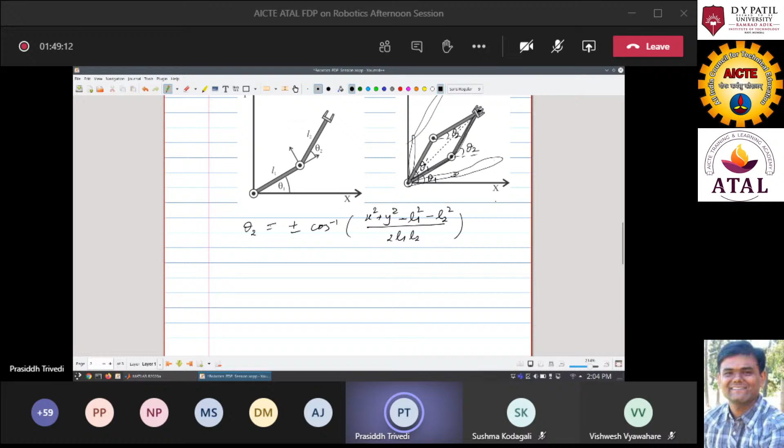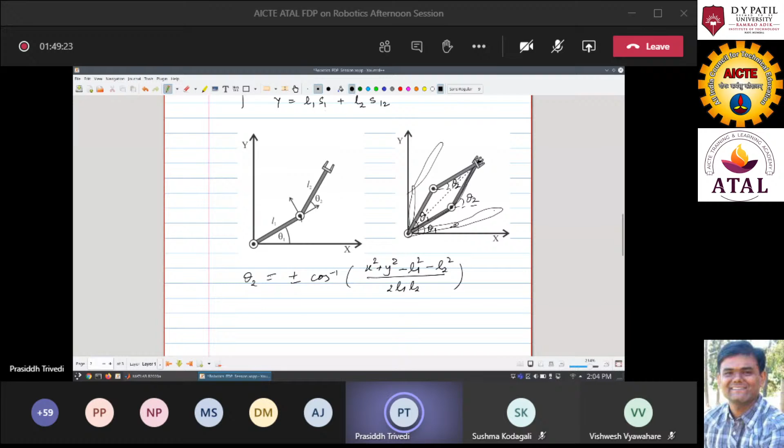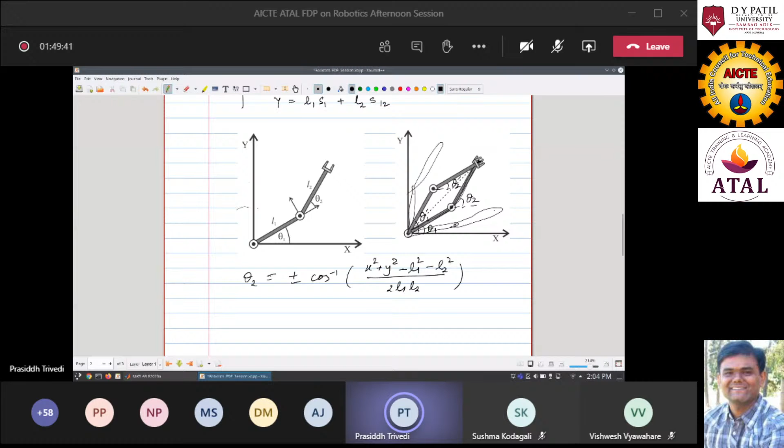So now we have seen kinematics, inverse kinematics, and now we want to look at the workspace. Here also it is quite evident that the workspace will be an annular region, larger than for the prismatic joint. If this joint was a prismatic joint instead of a revolute joint, then the annular region was ending here. But for this revolute joint, the annular region can extend inside. So the annular region is expected to be something like this.

Now we can plot this annular region, the workspace, in MATLAB, and that is the first analysis we are going to do in MATLAB. So let me open up my MATLAB. Are the fonts visible, or do I need to increase a little bit? Maybe increase.

Okay, I think these fonts are sufficient. Right. So let us start with the link 1 length. Link 1 length, let us keep it 0.4 meter, and link 2 length we will keep 0.3 meters. The theta variation is from 0 to 2 pi in steps of, let us keep the steps of 0.1.

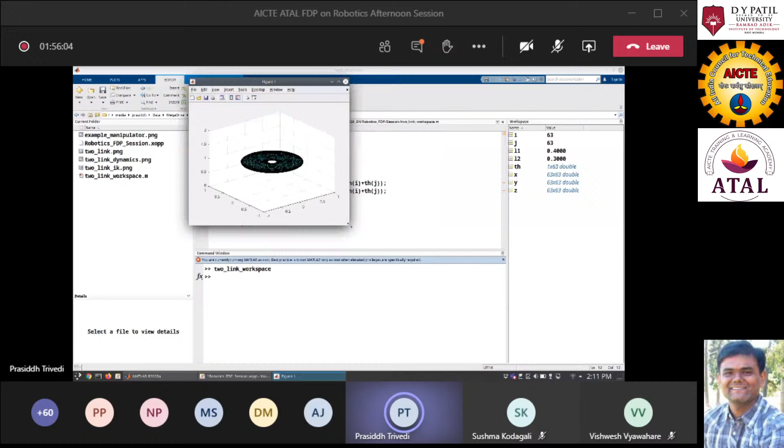Yeah. Now if you can see this workspace of the two-link manipulator, this is Z. Actually, this is on the XY plane only, but since we wanted to see this annular region properly, we have kept Z equal to 1 so that we can see this properly. We can make it 0 if we want to see this workspace on the plane itself. Right? So we can see that the workspace of this two-link manipulator is this annular region.

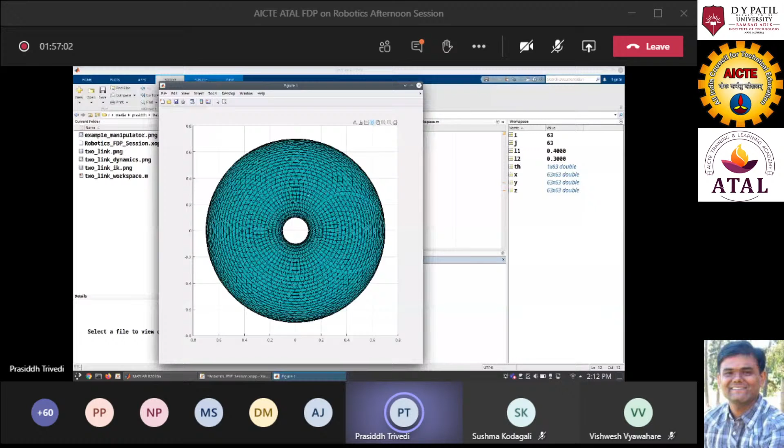Here you have the origin, your base link starts at the origin 0, 0, and then both the links can cover this entire region in this 2D plane. Okay, so this is the workspace for your two-link manipulator. So this manipulator end effector can move to all the points in this region. So that is a very important analysis to be performed when designing an industrial robot or any manipulator mechanism: what is the workspace of your mechanism?

If someone has used 3D printers, then 3D printers come with their workspace area, right? So they mention that the workspace of this 3D printer end effector is 15 by 15 by 15. Like that. So that workspace area is very important to be analyzed first when we have some robotic manipulators to be deployed for some application.

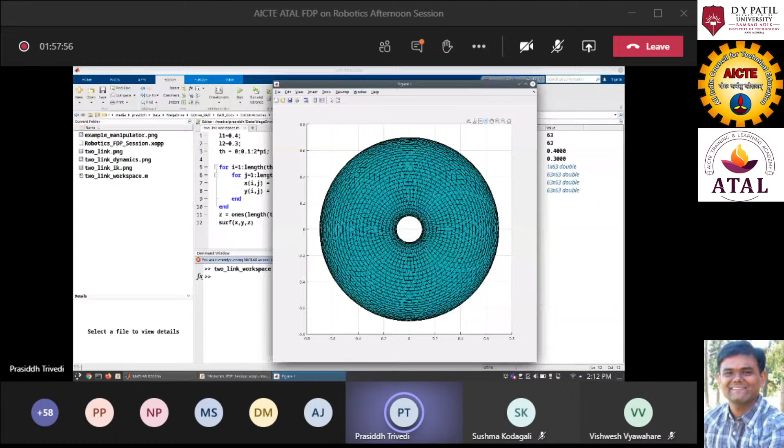Okay. So then with these kinematics, inverse kinematics, and workspace notions, there is a related notion of Jacobian. And how does Jacobian come into the picture? Because by definition, kinematics is the study of position and velocity of the rigid body without worrying about the forces. Right? In kinematics, we study position and velocity, both,

not forces. But right now in forward kinematics and inverse kinematics, we have studied only position. Right? So theta 1, theta 2 are the positions of both the links of the manipulator, and x and y are the coordinates of the end effector. That is the position of your end effector. Okay. So now what about velocity? To find out the velocities, we have to differentiate these equations with respect to time.

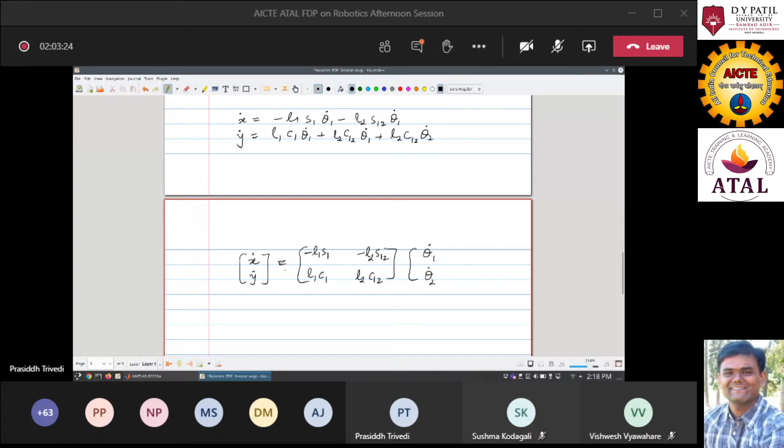Right. And this matrix is called the Jacobian matrix. This is the Jacobian of the given kinematic equation. So now we can write this: the position vector velocity x dot is equal to the Jacobian of the kinematics multiplied by the theta dot vector. So theta dot, the vector of velocities of the revolute joints, multiplied by the Jacobian gives us the velocity of the end effector.

But now we see the problem here. I mentioned that we may want the end effector to move at a certain speed. So then we are given some end effector speed, and we want to find out the speed of the manipulator angles. So the rate of change of theta 1 and the rate of change of theta 2 are the two variables that we want to find out given the velocity of end effector.

For that, we will have to invert this matrix. Then theta dot is given by J inverse times x dot. Now, given the velocity of end effector, I can find out the velocity of theta, and then I can actuate the joints using motors such that the desired theta dot, the desired velocity, is produced at those joints.

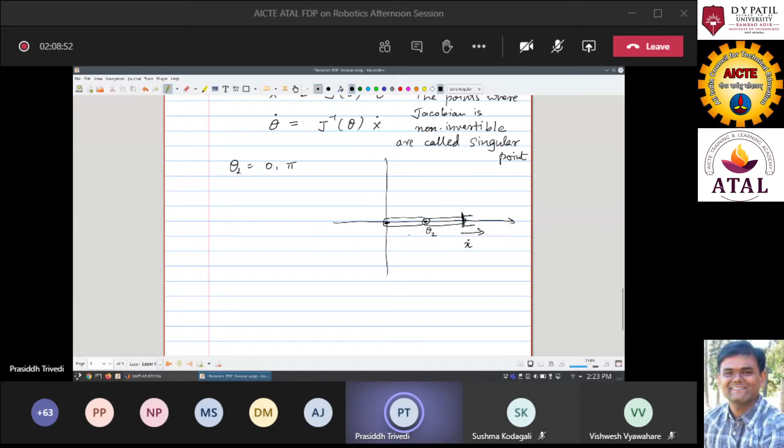So if some x dot velocity is given at this location, then there are no theta velocities which can produce that derivative of x, right? So if I say that my x dot is in this direction, no matter whatever you do with theta 2 or theta 1, you cannot produce this x dot. So that is what this singular point is, a point where you cannot move your manipulator in certain directions.

So wherever singularity occurs, you have a restriction of movement in certain directions. So your end effector can move only in certain directions when it is at a singular point. And those singular points are in the workspace, and we may want to manipulate objects which are located at the singular locations also. So we may need to work around. There is a lot of research available on this topic also.

So now the next item on the agenda will be to design this manipulator in MATLAB using MATLAB's robotics toolbox commands, and we want to manipulate this two-link manipulator to make a circle, right? So we want to solve this kinematics and inverse kinematics problem, and then find out the velocities. We'll find out this theta dot, which will produce the given x dot and given x.

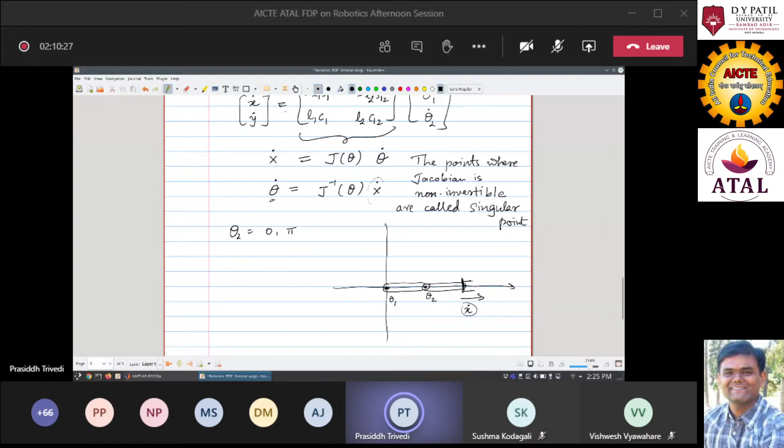So we will find out the manipulator angles which will produce the position of the end effector such that this two-link manipulator moves in a circle. So if a circle is given and I have this two-link manipulator, I want it to trace out this circle. Now I have drawn the wrong kind of circle. This circle is outside the workspace. So the circle may be like

I may want to trace out this circle, and I want to solve basically this inverse kinematic problem. So the positions are given. This circle is in the xy plane. All the positions in the xy plane are given, and I want to find out theta, the manipulator angles which will produce this position. Okay. So now let us go back to MATLAB and start making this robot.

Create a new file and start using the robotics toolbox commands now. Okay. So the first step will be to make this robot. Clear the workspace first. Yeah. So we'll call our robot, and there is a command called rigidBodyTree. In MATLAB we can create robots as a rigid body tree. So all these links, all these rigid bodies, are linked together in the form of a tree, right?

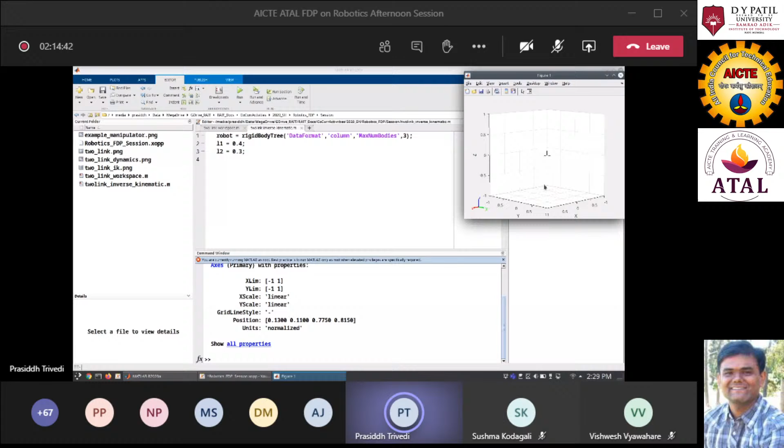But there is no robot right now. There is nothing defined. It is just empty, just the empty axis which is showing right now. There are no links we have added as yet. Okay. So now let us add some rigid bodies in the robot. The first body is link one. So let the body be equal to a rigid body. We will call it link one.

For the joint of this first body, we have to specify what kind of joint we are using. We are using a revolute joint for this body. So this body, right, is vertical here. So rigid body joint. Yeah, we will name it joint one, and the type of the joint is revolute joint. Okay. Then there comes,

transform, because when we change these rigid bodies, the coordinates have to be transformed into different coordinate frames. For this joint, we have this command trvec2tform. We'll see what this command is doing in a while. First, let us complete the robot, and this command will change for the second joint. So let me put the joint axis then. The next task is to point the joint axis.

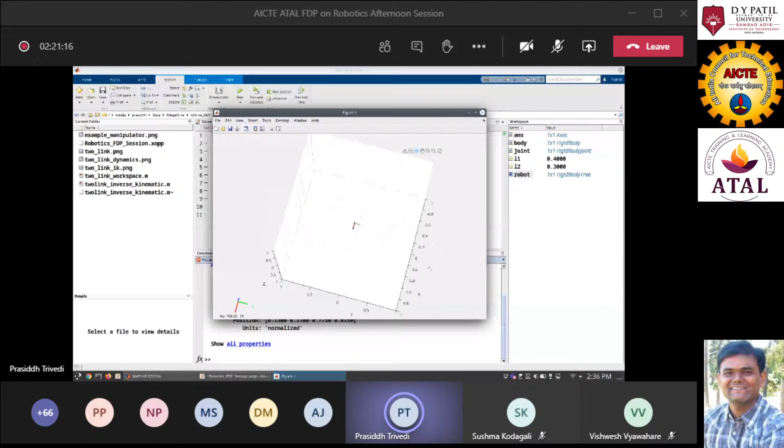Okay. So still we are not able to see anything, which we will be able to see after we complete this robot. So this first body is added. For the next body we will not write the entire code again; we'll just copy paste from the code. So now we have defined the next body, that is rigid body link 2. Again, we have defined the second revolute joint and set fixed transform.

Here now we have this different vector to transform. Right? So here we have used L1 because we are putting this link 2 at the location of L1, after link 1 ends. So that is L1, and then again the joint axis is Z axis. We are revolving around Z axis, and we are adding this body to the robot. Okay. Right.

And then the last body that will be added here is the end effector. So the last body is the tool or end effector. We are calling it tool here. This joint is fixed. We are not rotating this end effector joint. So that is this one. This joint here is not moving. It is not a revolute joint, it is not a prismatic joint. It is just a fixed joint, so we have kept it fixed.

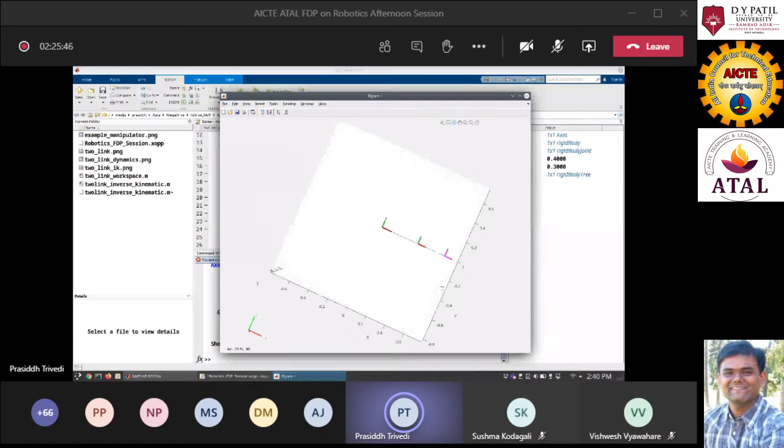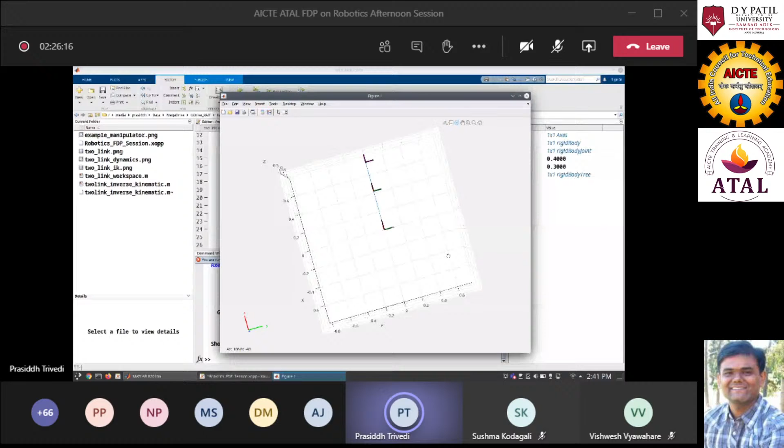We can see the robot that is started at x and y 0, 0. Its first link of length 0.4 and second link with length 0.3. It's reaching up to 0.7. Okay, so this is the robot, the two-link manipulator is created. You can see the view also of the manipulator. So we have created a rigid link manipulator in MATLAB using MATLAB's robotics toolbox.

I think we can take any questions if participants have here. Are there any questions? I cannot see any in the chat. No, sir. Yeah. Okay. So then

we will move ahead to define the trajectory. The trajectory that we want this to follow is a circle. So we'll define this.

Sir, one question is there. It's just requesting, can you shift that diagram? The shift meaning... In which sense? I didn't get.

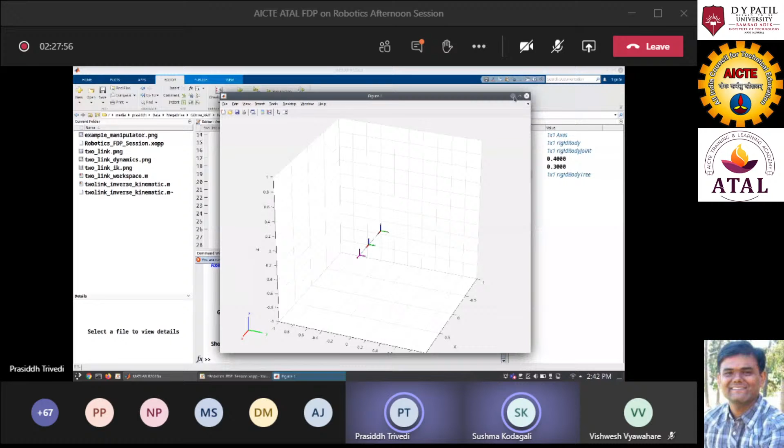So he's asking, can you explain the set fixed transform command? Yeah, that we are going to see. It is a very important aspect. So this is trvec. The command in this part is trvec2tform. So let me explain that command first. What is trvec2tform?

So we saw this. The motion is related with this rotation matrix. So why these rotation matrices are used is they give us a linear transformation. Those familiar with vector spaces are aware of the linear transformation or mapping. So this vector is mapped to another vector using this linear transformation. So this rotation matrix is a transform which transforms one vector to another vector.

Now the thing is, these transforms are very nice. There are very nice properties. Linear algebra is very well understood. The entire MATLAB was built on linear algebra. Google is built on linear algebra. So it is nice if we have a transform for everything, which can transform the vectors from one form to another. But there is an issue when we have translation motion. When we add something to the vector, say we have this position x or y, and we want to move to another position by adding some values to x and y both.

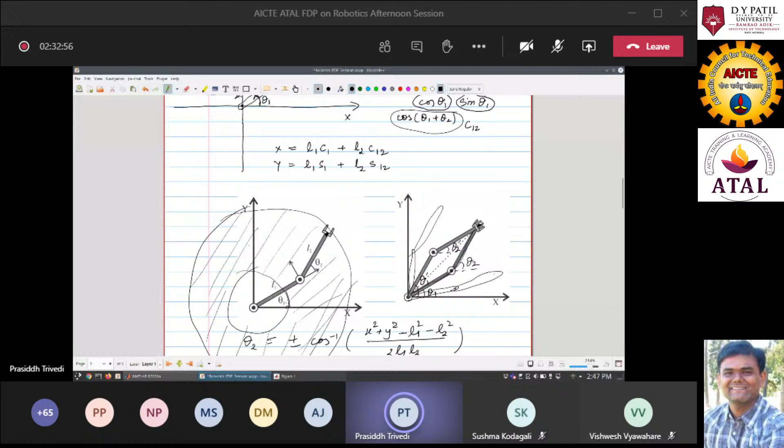So if I want to translate the vector by this amount, it transforms this vector into this linear mapping, linear transformation. I give the trvec2tform command this vector as input and it will return the matrix, this translation matrix. We can check this in the MATLAB command window. In the MATLAB command window, let us write this command.